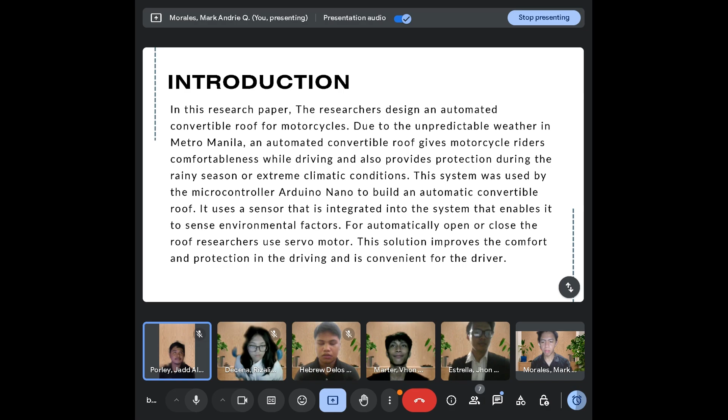In this research, the researchers design an automated convertible roof for motorcycles. Due to unpredictable weather in Metro Manila, this automated convertible roof gives motorcycle riders comfort while driving and also provides protection during the rainy season or extreme climate conditions. This system uses the microcontroller Arduino Nano to build an automatic convertible roof.

It uses a sensor integrated into the system that enables it to sense environmental factors. To automatically open or close the roof, researchers use a servo motor. This solution improves comfort and protection in driving and is convenient for the driver.

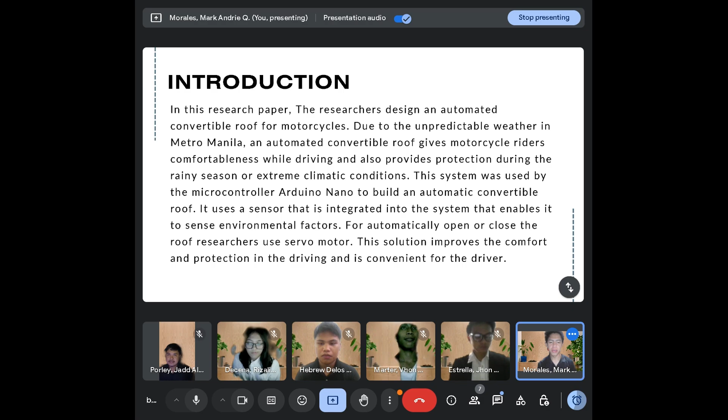The background of the study: the Philippines experiences erratic weather that often hinders the comfort and safety of motorcycle riders. Despite motorcycles being an efficient transportation option, riders are exposed to environmental elements such as wind, sun, and rain. This study aims to address this issue by developing an automated convertible roof for motorcycles.

Powered by Arduino Nano microcontroller and environmental sensors. With approximately 4 million motorcycle riders in the Philippines, there is a daily accident average of 78 due to factors like lack of safety gear and road conditions, showing the need for an innovative safety solution. This project seeks to reduce such hazards while ensuring rider convenience, particularly in urban areas like Metro Manila, where adoption could be most impactful.

The automated roof system offers not only protection but also contributes to safer and more efficient riding conditions across various weather scenarios.

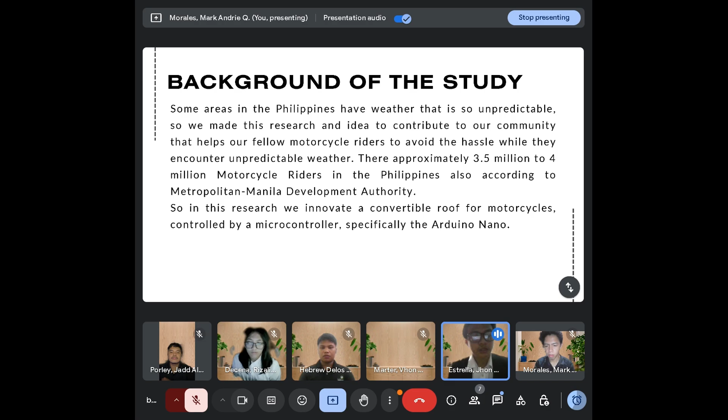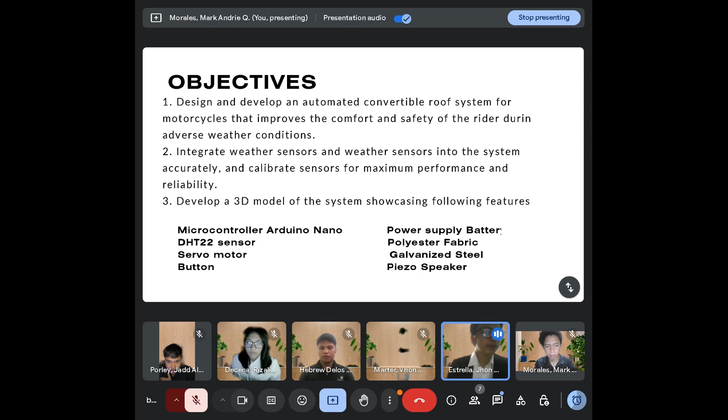Our objectives: one, design and develop an automated convertible roof system for motorcycles to improve comfort and safety for riders during adverse weather conditions. Two, integrate weather sensors into the system. Three, develop a 3D model of the system showing the following features: microcontroller Arduino Nano, DHT22 sensor, servo motor, button, power supply, and polyester fabric, galvanized steel, and piezo speaker.

For the scope of this research project, it is to design and develop an automated retractable roof system especially for motorcycles. It aims to create a lightweight, durable, and weather-resistant solution that integrates seamlessly with standard motorcycle designs. It will explore automation mechanisms such as hydraulic or electric systems and incorporate features like easy deployment, manual override, and compatibility with sensors for weather adaptation.

For the limitations of this research, it excludes high-speed motorcycles, off-road bikes, and custom models due to design complexities.

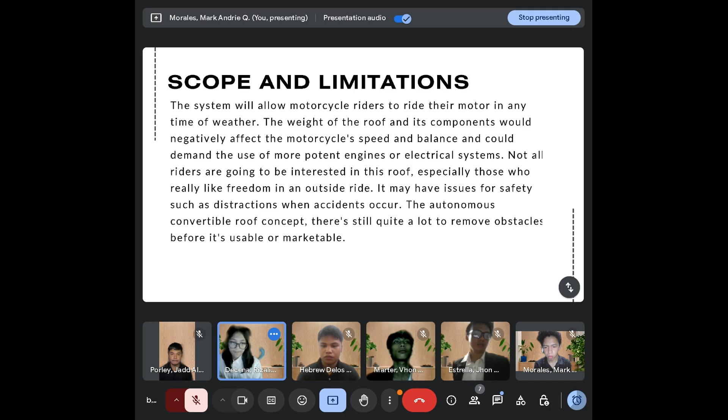For the significance of our study, our group would like to expand the significance of this research and hope it will benefit groups and communities such as delivery riders, motorcycle taxis, and motorcycle commuters by enhancing riding experience and improving safety while riding, and also benefit motorcycle manufacturers.

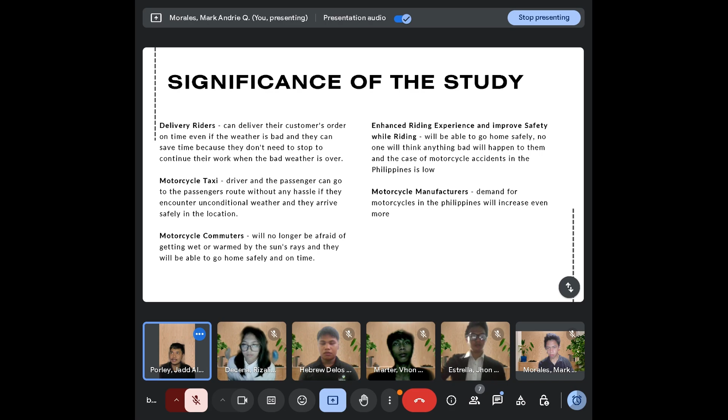For our research design or methodology, in the context of our automated convertible roof for motorcycles project, this research design involves the integration of hardware like Arduino Nano, DHT22 sensors, and servo motors with software to create a functional prototype. The study design ensures system components, such as sensors for detecting environmental changes and actuators for roof operation, are aligned with the project's objectives to enhance rider safety and comfort under varying weather conditions.

This process involves iterative stages such as defining objectives, designing hardware and software setups, prototyping, and testing under real-world conditions to validate functionality and reliability.

Now we go to the block diagram. First we discuss the design, the block diagram. It's a diagram of a system in which the principal parts or functions are represented by blocks connected by lines that show the relationship of the blocks. First we have the source, second the microcontroller for retraction and signal monitoring, and last shutdown.

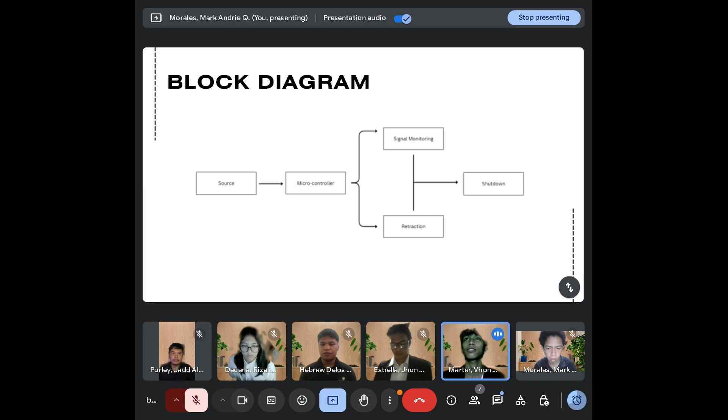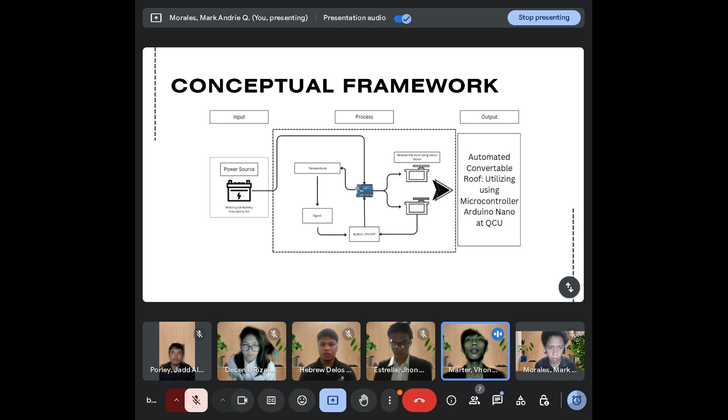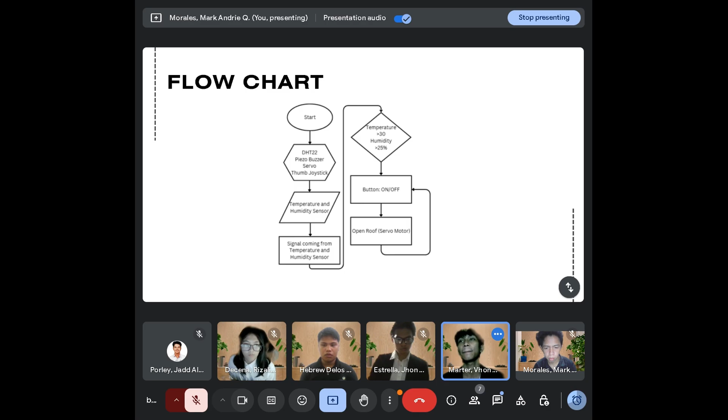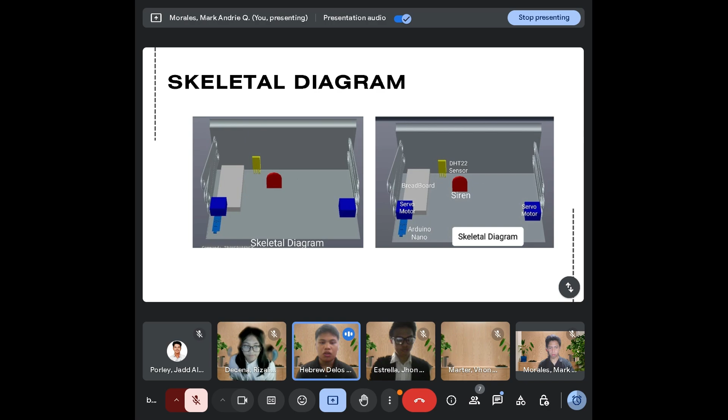We also have the DHT22 sensor used to sense the weather. We also have the siren, which is a sound system to warn the driver that the product is opening, or the automated roof will open. The servo motor will push and pull the steel to make it open and close.

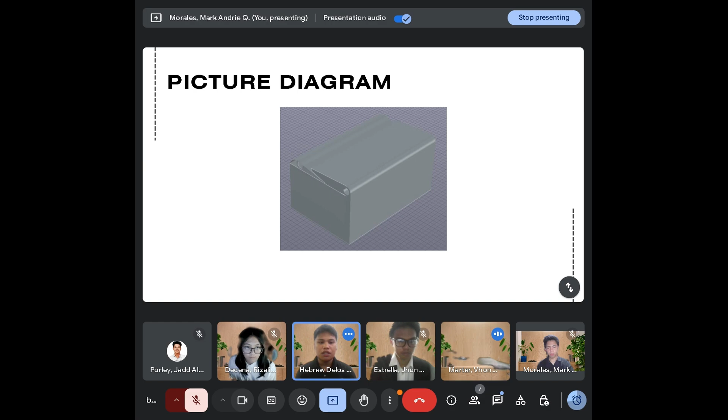For the next diagram, here we can see the outer part of our product, which is the automated roof for motorcycle. This is its style if it is closed, and this is the style of our product if it is open.